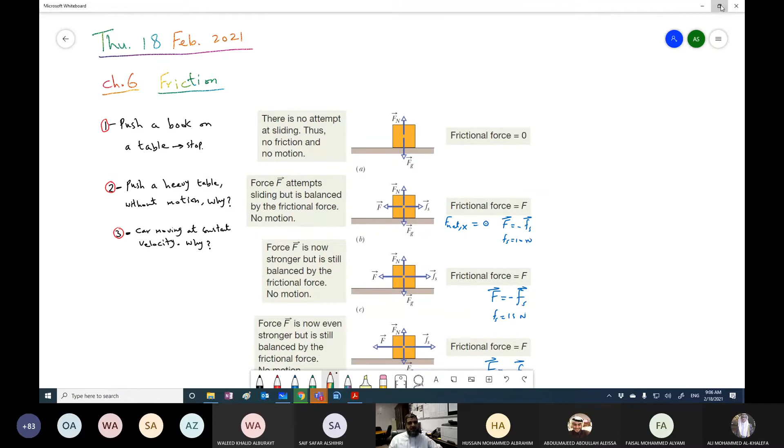If you are pushing a heavy table, like this table in front of me, I push it and it doesn't move. I am pushing and there is no motion. That means net force equals what? Zero. Net force equals zero, because it is not moving, but I am pushing. So this is evidence that there is another force opposing my force and cancelling it. So the net force will be zero. This is another evidence that there is a friction force.

Number three, if you have a car moving at constant velocity, why is the car moving at constant velocity, even though you are pressing the gas? That means there is a force. Why is the car not accelerating? Why is the speed of the car not increasing? Why has the speed stopped increasing and the car is moving at constant velocity? Resistance, because of the frictional forces, an air resistance or frictional forces with the road. So all of these examples give us evidence that there is a friction force.

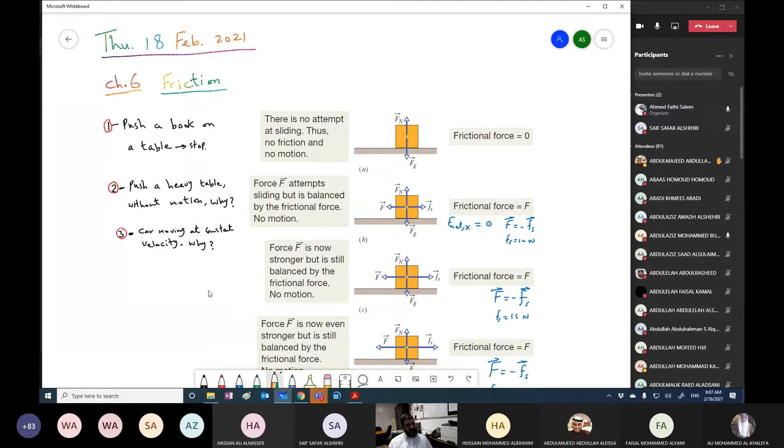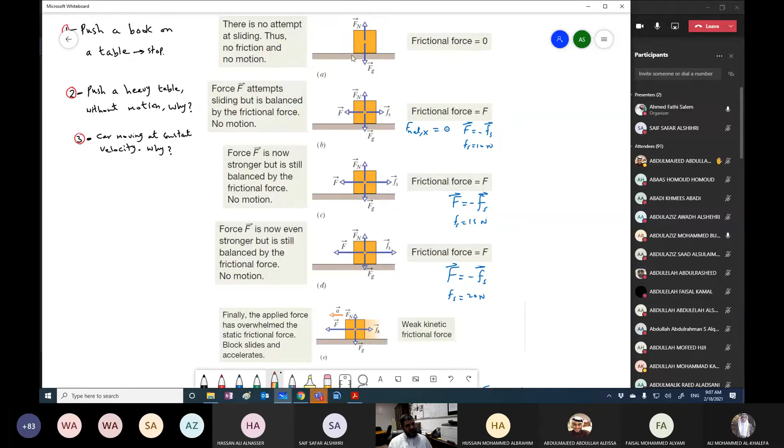Let us take a few cases here in this figure, coming from your textbook. In the first case, there is no attempt at sliding, thus there is no friction and there is no motion. Here, the box is just resting and you are not trying to push it, and this surface is a horizontal surface, level, with no inclination. In this case, we have Fg downward, Fn upward, and there is no friction force. Right, next case.

If you are attempting to slide or push the object with a force F, this F on the left, you are trying to push it, but it is balanced and there is no motion. This force is equal to the static friction force, Fs, and here F net along the horizontal axis equals zero, meaning your force is being cancelled by the friction force. So if you are pushing with 10 Newton, what will be the Fs? Fs will be 10 Newton in the opposite direction. This is very simple.

Next, if you are increasing your force, instead of 10 Newton, now it's 15 Newton, and yet there is no motion. The object doesn't move. You are trying to push harder and harder, and now your force is 15 Newton, the object doesn't move. How much is the static friction force then? 15 Newton, it will be 15 Newton in the opposite direction. You even put more and more effort, but still the object doesn't move. Let us say you are applying 20 Newton now, and still it didn't move. How much is the static friction force? It will be 20 Newton.

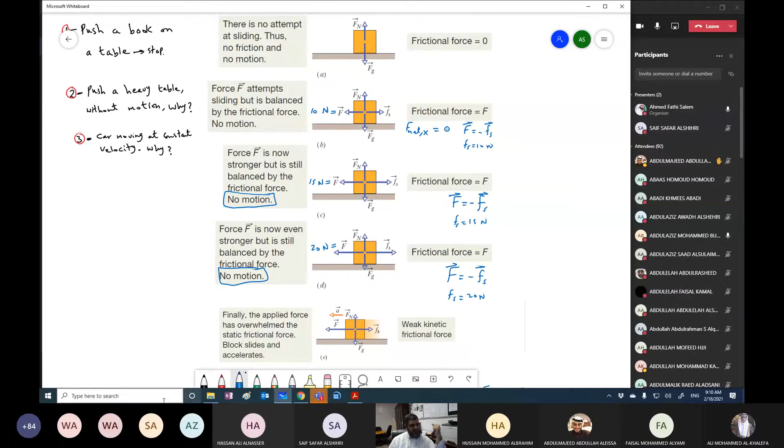As you can see, static friction force has many values. It will increase until the object starts moving. Finally, the applied force has overwhelmed the static friction force, and the block slides and accelerates. Let us say this force is 25 or 30 Newtons, for example, 30 Newtons. Now we don't have Fs, static friction force; we have Fk, the kinetic friction force. Why do we have kinetic friction force? Because the object has started moving. In the previous cases, the object was not moving, so we were talking about a static friction force.

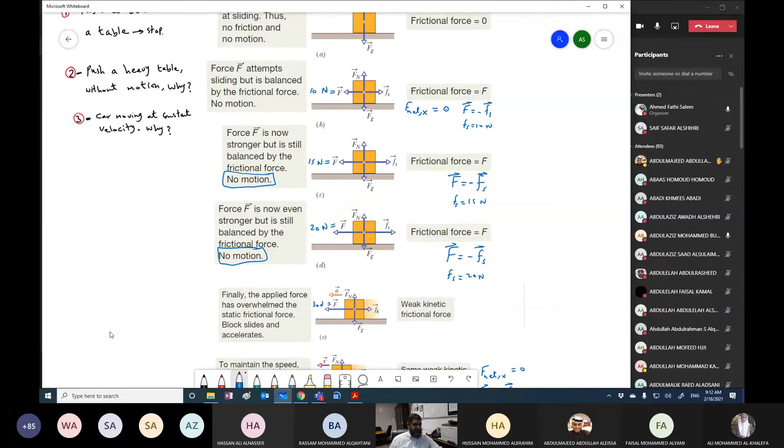If we would like to maintain the speed, we will weaken the force. We can reduce the force we are applying on our object such that this force is equal to the kinetic friction force. In that case, our object will be under net force equal to zero and the acceleration will be zero. So the applied force equals the kinetic friction force in the opposite direction, and the velocity will be constant in this case.

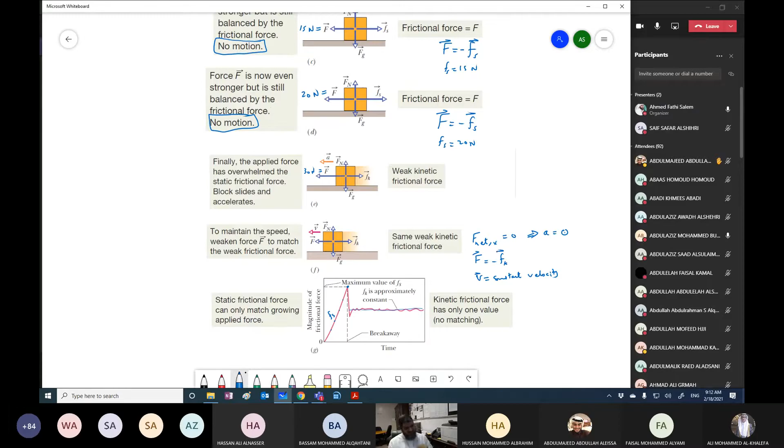It is very important to notice the following. This is the y-axis, the magnitude of the force. Along the x-axis we have the time. We are trying to plot what happened to the force in the previous example. At the beginning there was no force, and there was no friction force because there was no applied force on our object.

Once we start pushing the table and it doesn't move, we have Fs. As I increase the force, Fs increases, more and more, until we reach a maximum value. After that maximum value, the object will start moving, and we end up with Fk.

Notice that the kinetic friction force is almost constant. There are small ups and downs, but on average it is constant. So the kinetic frictional force has only one value, but Fs, the static friction force, can only match the growing applied force. Fs keeps increasing until it reaches a maximum value, Fs max, while Fk is approximately a constant value.

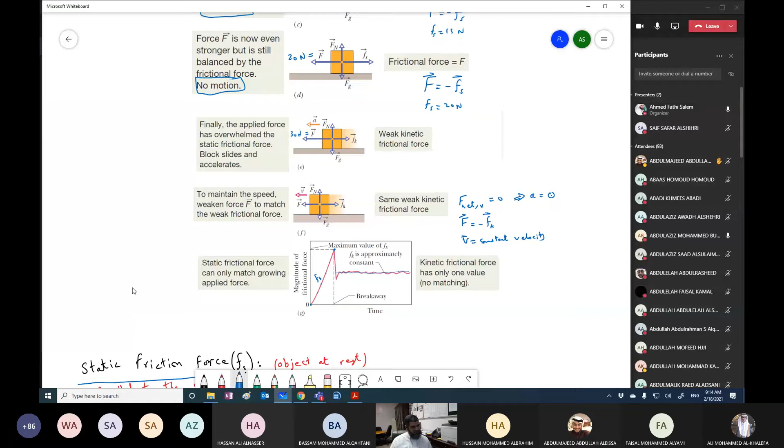Let us put this in writing. Static friction force, Fs: the object is at rest, doesn't move. It is parallel to the surface, and it should be opposite to the intended direction of motion. Let us have this example.

This is an inclined and rough surface, there is friction. You put this object on it, and the object is at rest, it doesn't move. What are the forces acting on it? There is the gravitational force, which has two components: one perpendicular component, mg cosine theta, and one component parallel to the surface, mg sine theta.

If there was no friction force, what is the intended direction of motion of this object? It will slide down the incline. So the static friction force will be opposite to the intended direction of motion, so Fs will be up the incline.

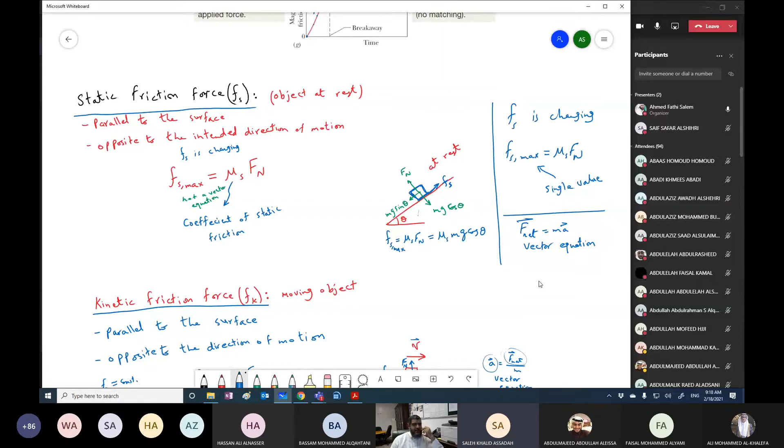Let me ask Saleh. My question doctor is: is Fs a proof of Newton's third law? How do you mean? When we increase the force, the box doesn't change. So is it a proof of Newton's third law? No, of course not.

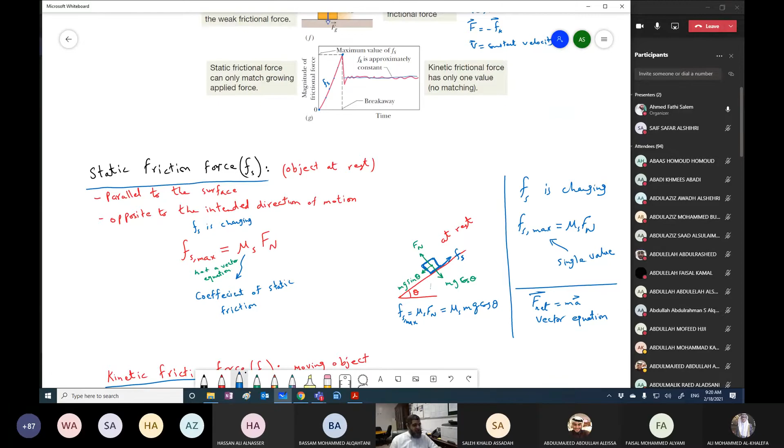Let us continue with the kinetic friction force Fk. Kinetic friction force - if the object is moving, we won't have static friction, we'll have kinetic friction. Also it is parallel to the surface. Its direction is opposite to the direction of motion. Before we were saying opposite to the intended direction of motion, but now since the object is moving, it will be opposite to the direction of motion.

So in this example, the object is moving to the right. There is a normal force upward. Of course we have Fg downward. So Fn is up, the motion is to the right, meaning Fk will be to the left. It is parallel to the surface and opposite to the direction of motion.

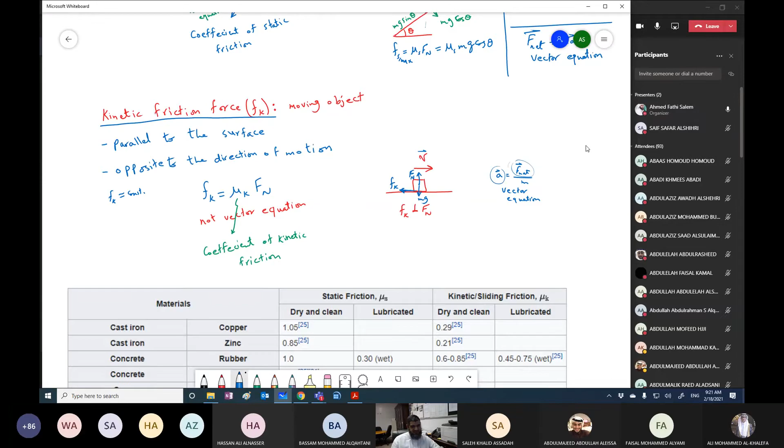How much is Fk? Fk is constant, all of it - not like Fs, which was changing, only the maximum value was constant. Here Fk is constant and it is equal to mu k multiplied by the normal force. It is also not a vector equation because Fk is not in the same direction as that of the normal force, and mu k is the coefficient of kinetic friction.

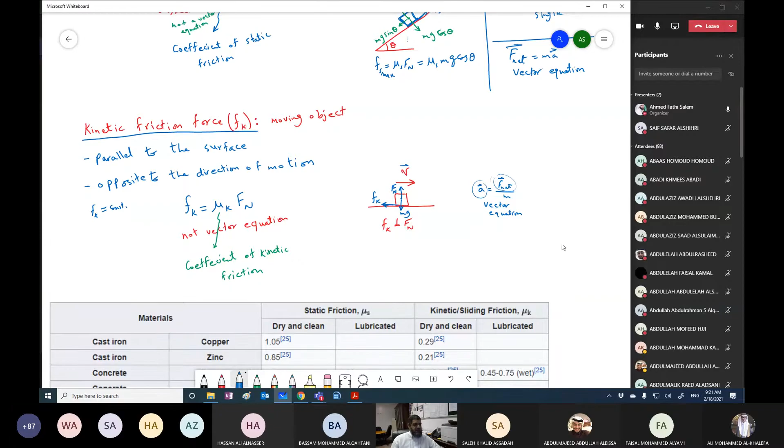This is a table which gives you surfaces like cast iron with copper - iron with copper, okay. Mu s for these two surfaces when placed together is 1.05, but mu k is 0.29. If you go to iron with zinc, mu s is 0.85 and mu k is 0.21.

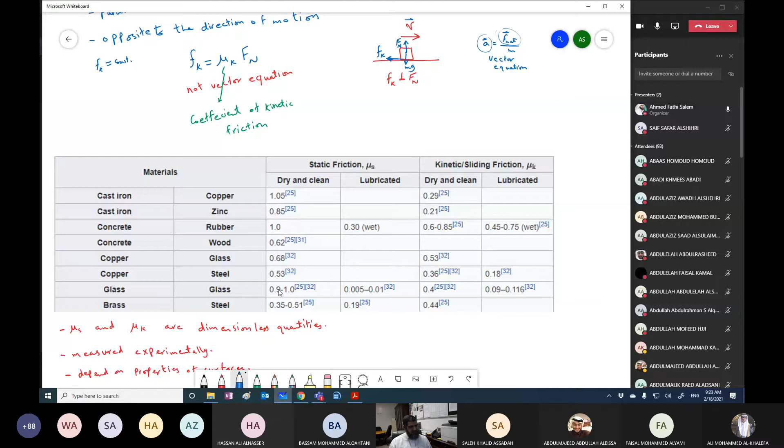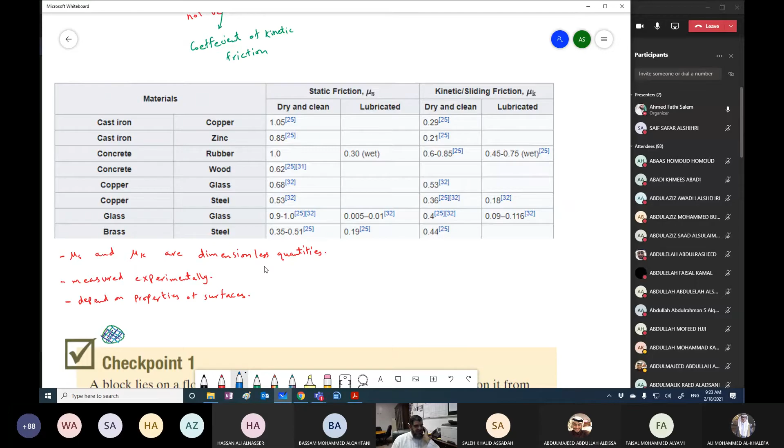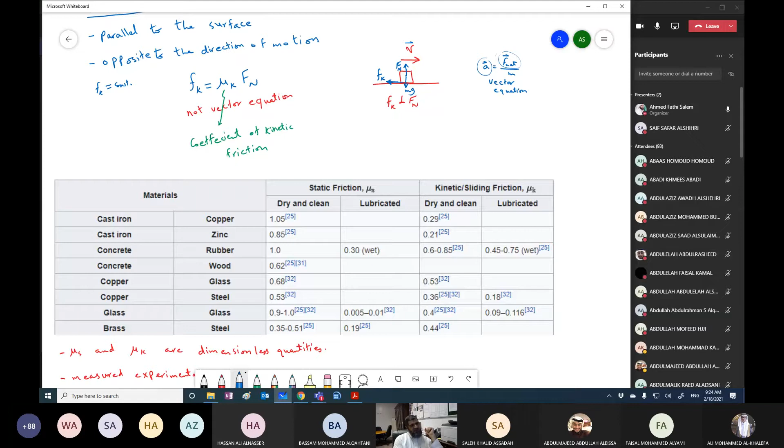What we benefit from this discussion is that mu s and mu k are dimensionless quantities. It doesn't have a dimension, it doesn't have a unit. Notice Fk equals mu k Fn - Fn is a force in Newtons and Fk is a force also in Newtons. So Newton here, Newton there, meaning mu k and mu s are both unitless and dimensionless.

They are measured experimentally. If you would like to know how much is mu s or how much is mu k, you have to do an experiment and determine these two quantities. They depend on properties of surfaces.

Okay, checkpoint number 1. A block lies on a floor. What is the magnitude of the frictional force on it from the floor? The block is lying on a floor like this, there is no horizontal force and there is no motion. What will be the static friction force in this case?

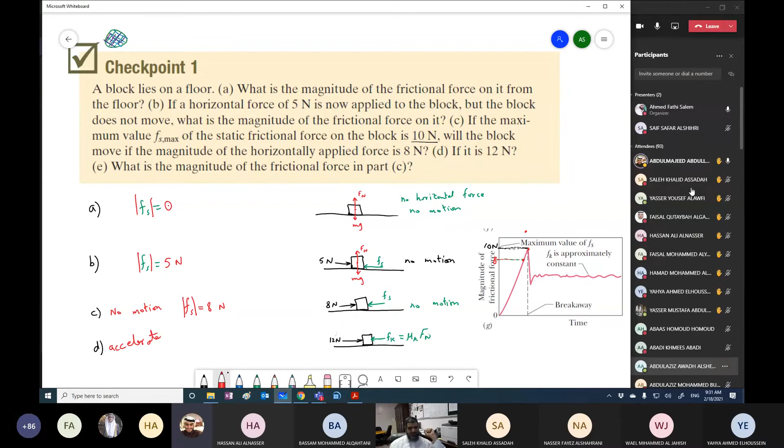So in this case we have 12 Newton to the right and there is Fk to the left. If Fs max is 10, what will Fk be? It will be less than 10. So there will be acceleration to the right. What is the magnitude of the friction force in part C? We already wrote it. Fs will be 8 newtons.

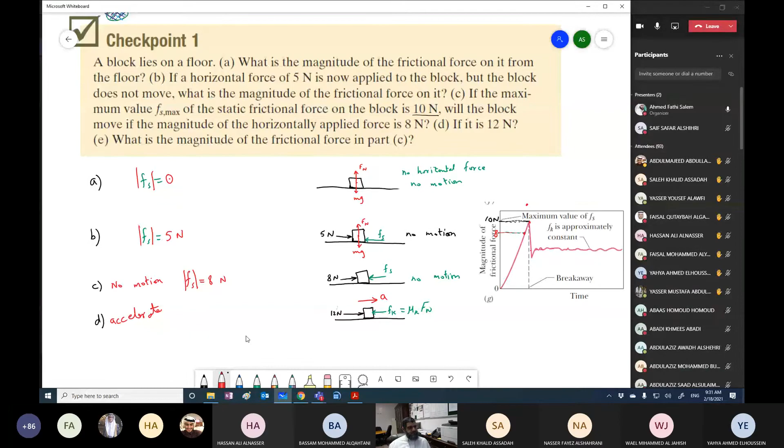أظن الموضوع سهل وبسيط يا شباب. Please lower your hands, خلاص. نزلوا ايديكم. برضو نزلنا يدنا ولسه ظاهرة عندك. لا حول ولا قوة إلا بالله. يا دكتور بس يحتاجون يفتحوا المايك ويسكرونه وراح تتغير. تظبط الدنيا؟ ايه ايوه افتح المايك وسكر وتظبط معك الدنيا. ماشي شكرا.

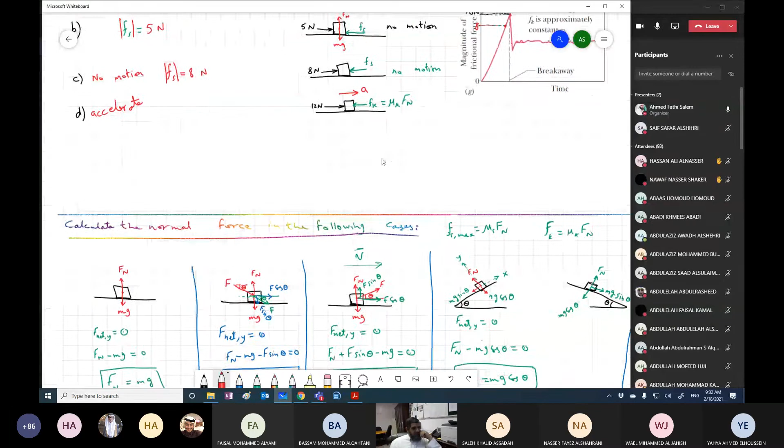Now I would like to remind you of this golden rule which we mentioned earlier: that the normal force is not necessarily equal to mg. هنا فقط من باب التأكيد، لأن النورمال فورس هي السوبر ستار عندنا في شابتر 6. الستاتيك فريكشن فورس بتعتمد على النورمال فورس، والكاينتيك فريكشن فورس also تعتمد عليها. فإذا عملت غلط في حساب النورمال فورس، الفريكشن فورس هتطلع غلط. فلذلك حطيت هنا تذكير بالقاعدة الذهبية اللي قلناها قبل كده.

اوعى تحط في بالك انه النورمال فورس بتساوي mg وانت مغمض كده، غلط، هذا كلام مش صحيح. The normal force will be equal to mg only if your object is not accelerating and it is on a level, horizontal surface. In this case Fn minus mg equals 0, so Fn equals the weight mg.

But if you are pushing your object with a force down, or pulling it with another force with a component up, or putting it on an incline, the normal force will not be equal to the weight. For example it will be greater than the weight: Fn equals mg plus F sine theta, since F has components F cosine theta horizontal and F sine theta downward. So the forces give Fn up minus mg down minus F sine theta down, ending with Fn equals mg plus F sine theta.

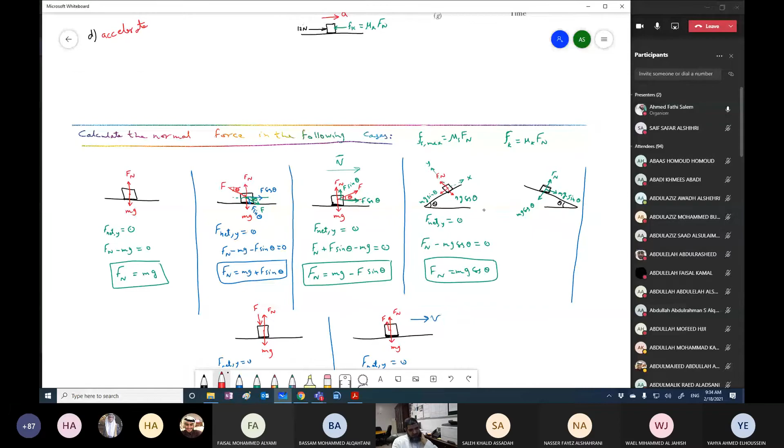This is another case where you are pulling at an angle theta: F cosine horizontal, F sine vertical. So Fn plus F sine minus mg equals 0, and Fn will be less than the weight. طبعا في حالة الانكلاين قلنا قبل شوية ان Fn يساوي mg cosine theta، وسواء كانت الزاوية هنا أو هناك it is the same thing.

Also, if you are pushing vertically down on your object, what happens to the normal force? It will be greater than the weight, because Fn up minus the applied force down minus mg down equals 0, so the normal force ends up greater than the weight: Fn equals mg plus F.

If you are trying to pull the object vertically up without losing contact with the surface - يعني still touching the surface لكن خففت الكونتاكت بينه وبين السيرفس - then Fn plus F minus mg equals 0, so Fn equals mg minus the force, meaning the normal force will be less than the weight. I hope this is clear.

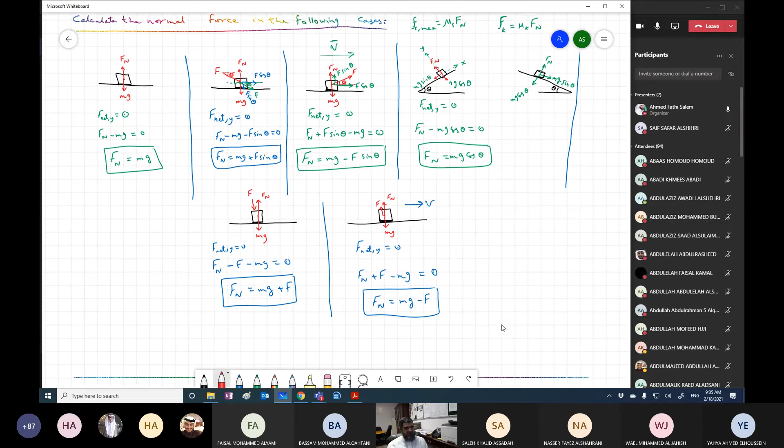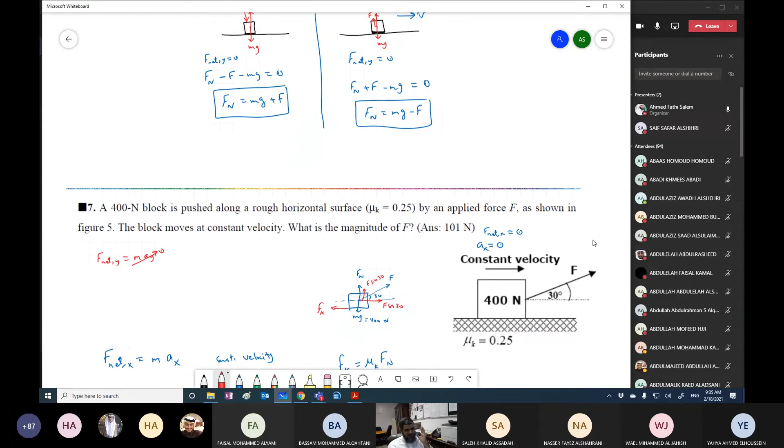This is just a reminder for us to pay attention, يا شباب. للأسف بعض الشباب حاطط في دماغه قاعدة إن النورمال فورس هي الويت - لا، this is not always true.

انتهى الدرس. Let us take a few examples from old exam problems. A 400 Newton block, which you see here in front of you, is pushed along a rough horizontal surface with Mu k of 0.25 between the block and the surface, by an applied force F which is shown. The block moves at constant velocity.

This is a very important word, and you need to read the question carefully: this block is moving at constant velocity. ترجم يا مترجم، what do we mean by constant velocity? What does it mean - that this object is moving at constant velocity?

نفس الأسماء اللي بيعملها كل مرة. مش عارف، وفي ناس مطنشين مش عايزين يجاوبوا.

معتز، في عندنا واحد اسمه معتز. يس دكتور. معتز، ايش معنى كلمة constant velocity؟ الاكسلريشن زيرو. طب ما انت عارف اهو، ما ترفعش ايدك ليه؟ Acceleration is 0. Then what will be the net force in this case will be also equal to 0.

Now we will draw the free body diagram on our object. So this is our object of interest. What are the forces acting on it? We have mg downward. How much is mg? It is 400 Newton. Normal force, which is the surface pushing this block upward, normal force, and it is perpendicular to the surface.

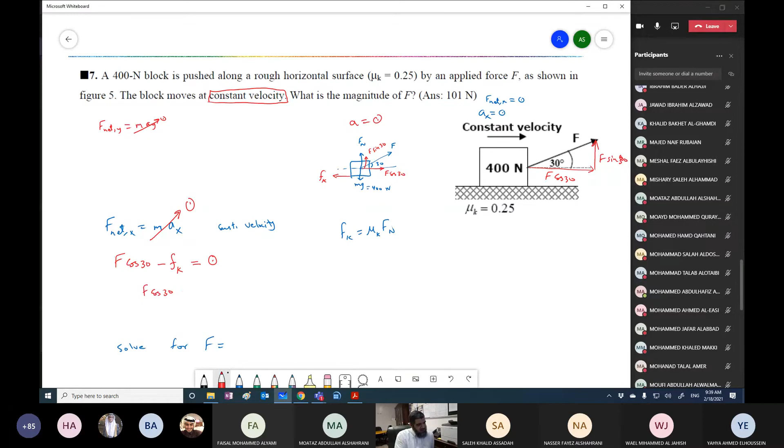So from here we can write that F cosine 30 equals Fk. But how much is Fk? We studied it before. Fk is nothing but mu k multiplied by Fn. So we will end up having F cosine 30 equals mu k multiplied by the normal force.

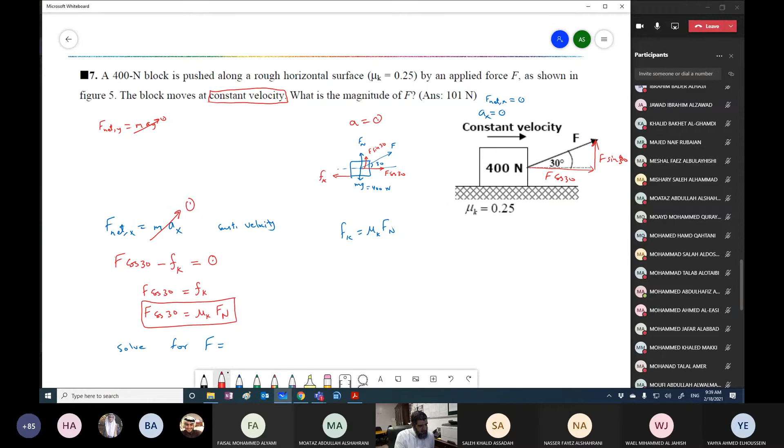How much is the normal force, guys? How much is the normal force? Don't rush. We will go to the vertical axis and apply Newton's second law, and from there we'll find how much is the normal force.

So along the y-axis we have the normal force, which is upward, minus mg, which is 400 downward, and we have this component F sine 30 upward as well. So this is plus F sine 30 minus 400 Newton, all of this equal to 0. So from here we can write that Fn equals 400 minus F sine 30. So this is our normal force.

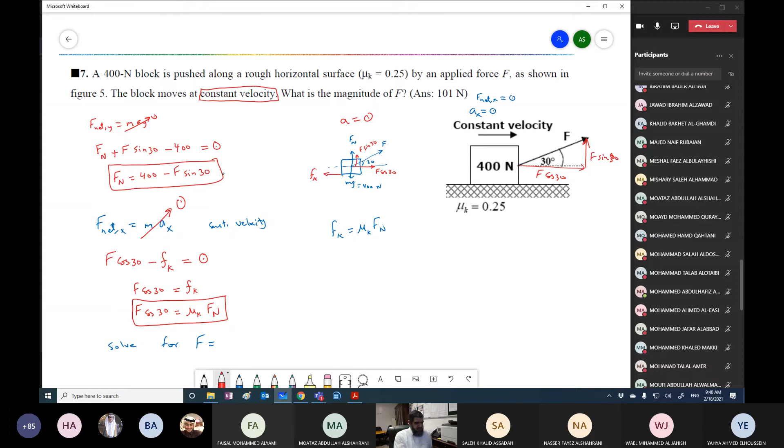So you take this normal force and plug it here, and you can solve for the force F. He is asking how much is this force which is causing this motion with constant velocity of this block on such a rough surface. So this implies F cosine 30 equals mu k multiplied by Fn, but Fn is 400 minus F sine 30. Now you can solve for F and you will find that F equals 101 Newton.

How much is this mu k? Mu k is given, it is 0.25 in magnitude.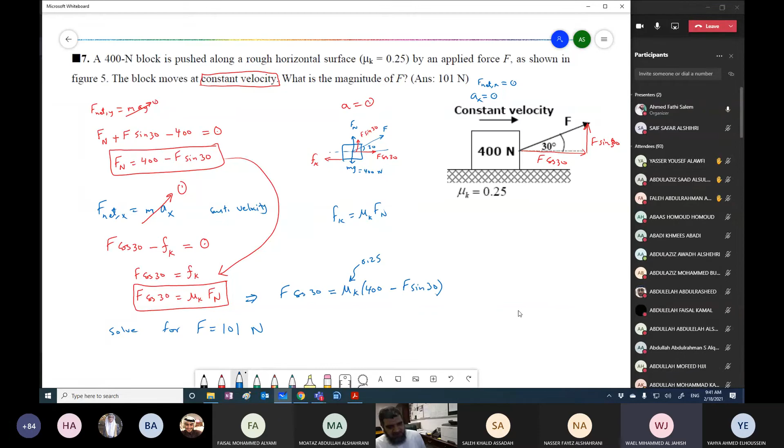Yes. Do you have any problem with this example? You have any questions? يا شباب كل دول رافعين ايديهم. دكتور معلق اظن التيمز، يعني معلق. نزلت يدي وطالع انها مرفوعه. Open the mic to remove the lower hand. اوكي. طيب الحمد لله ما فيش حد عنده سؤال.

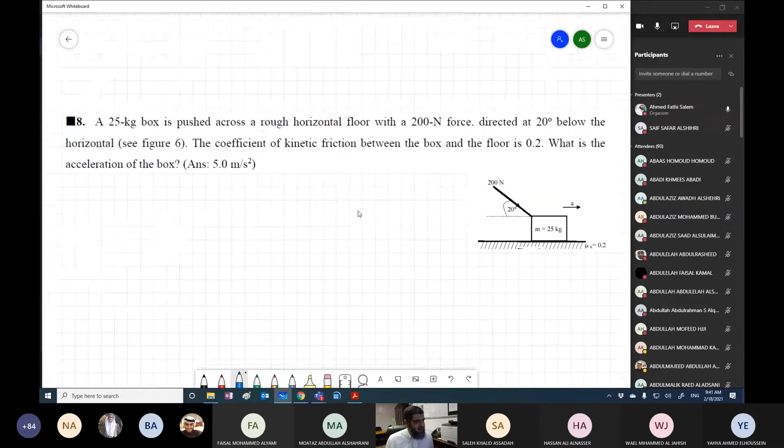Let us take one more example. Here we have a 25 kg box pushed across a rough horizontal floor with a 200 Newton force, directed at 20 degrees below the horizontal. So this is the 20 degree angle. The coefficient of kinetic friction between the box and the floor is 0.2. What is the acceleration of the box?

Now, this is 200 Newtons. How do we analyze this 200 Newtons so we can draw the free body diagram correctly? So this is our block, like this. What are the forces acting on our block? We have the weight, mg. Normal force, we have normal force up. So this is the normal force.

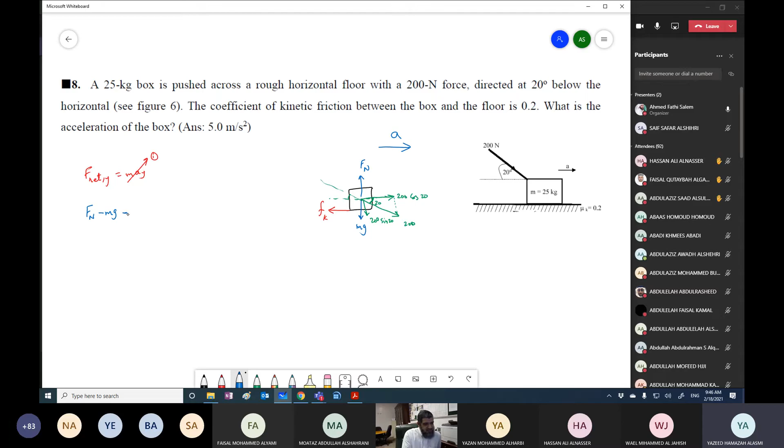Sine 200? No, 200 multiplied by sine 20. Is this positive or negative? This is negative, minus 200 sine 20. All of this equals 0. This means from here, Fn can be written as mg plus 200 sine 20.

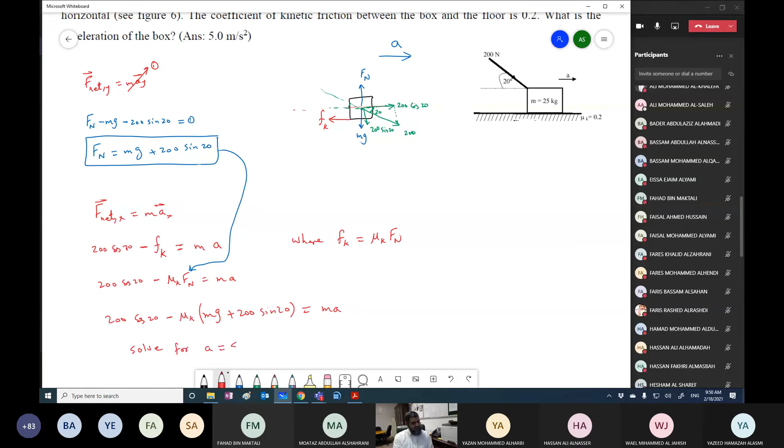The problem is solved now. We'll remove mu k and put 0.2, remove the mass and put 25 kg, remove g and put 9.8, and you solve for acceleration. The acceleration will be 5 meters per second squared.

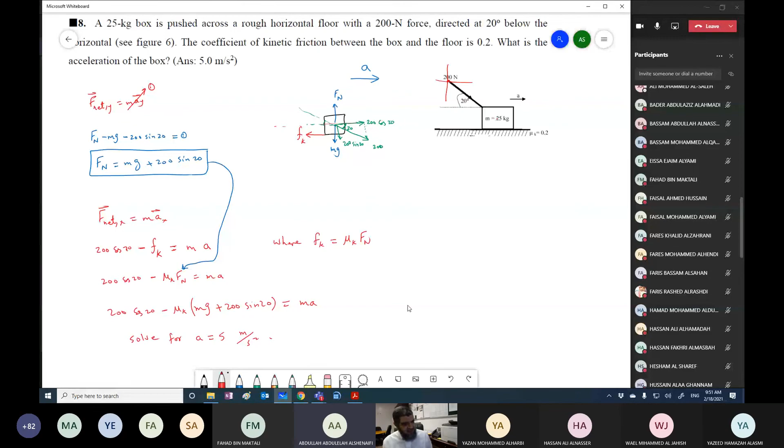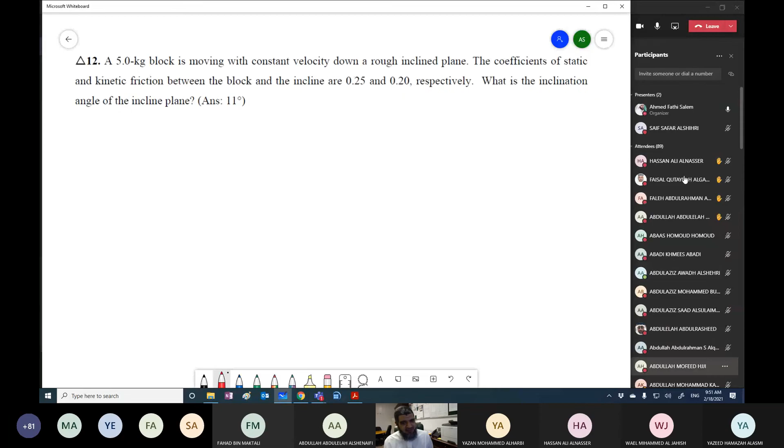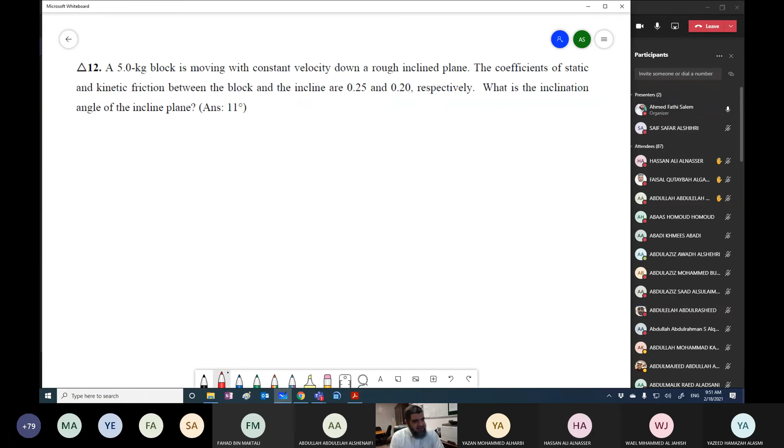A 5 kg block is moving with constant velocity down a rough inclined plane. So you have a rough inclined plane, and you have a block moving down with constant velocity. This surface is a rough surface.

The coefficients of static friction and kinetic friction between the block and the incline are 0.25 and 0.2. Mu s and mu k are given. So this is mu s and this is mu k.

What is the inclination angle of the inclined plane? We want to know how much is this angle theta. To answer this problem we need to draw the forces acting on our object.

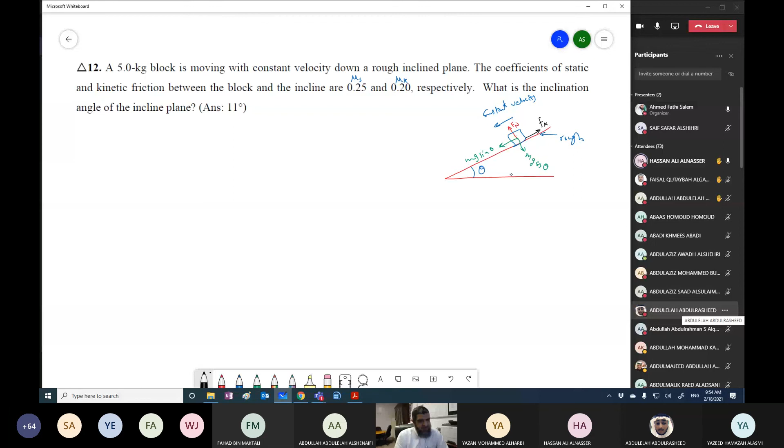Okay, now we can write F net along the y-axis equals MAY. Is there motion or acceleration in the y direction here? There is no motion. So this is equal to 0. So from there we write Fn minus mg cosine theta equals 0, and Fn will be mg cosine theta.

That's what we got from the vertical axis. Now on the horizontal axis, F net along x equals MAX, but it said constant velocity, meaning the acceleration is equal to 0. What are the forces, this force to the right, this force to the left? So I'll have Fk minus mg sine theta, all of this equals 0.

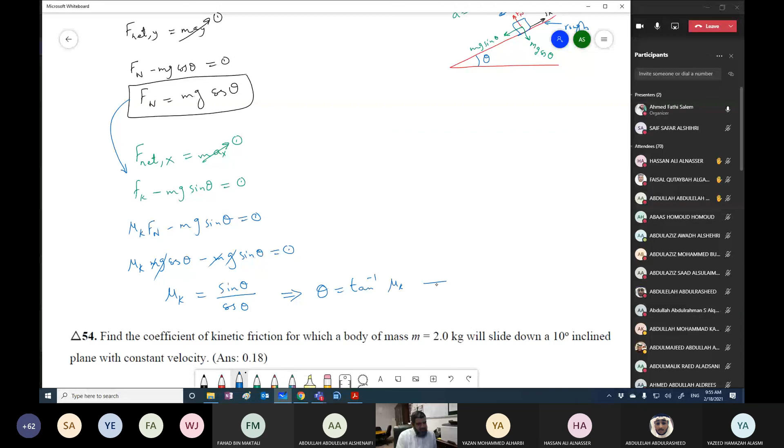How much is mu k? 0.2, and from here you will get theta equals... what's the answer? It comes out to 11 degrees.